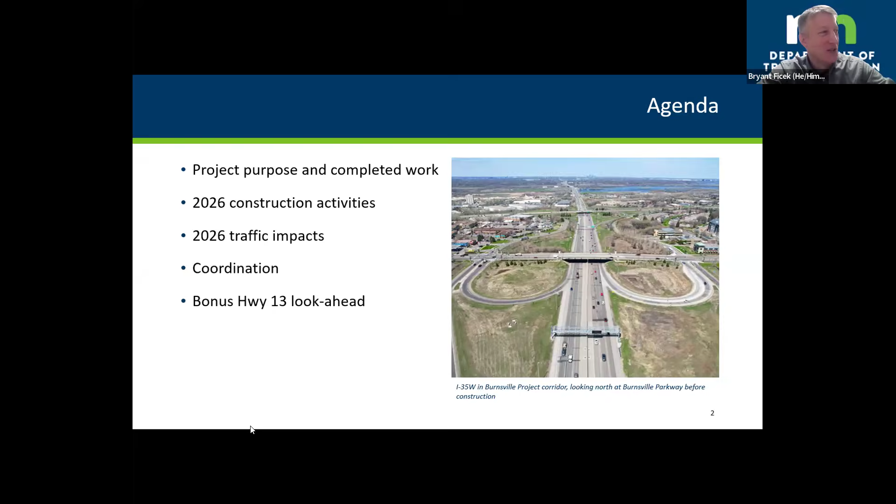The other items on there are a drainage system. As when it rains, when we have events, we want to make sure we're handling that appropriately, not only conveying the water where it needs to go, but treating it, and then lighting, making sure it's well lit, so when you're traveling at night, it's a safe environment. And then where we have exit and entrance ramps that come down to local systems, we want to make sure that the facilities there for pedestrians meet our ADA requirements and are easy for people to get around.

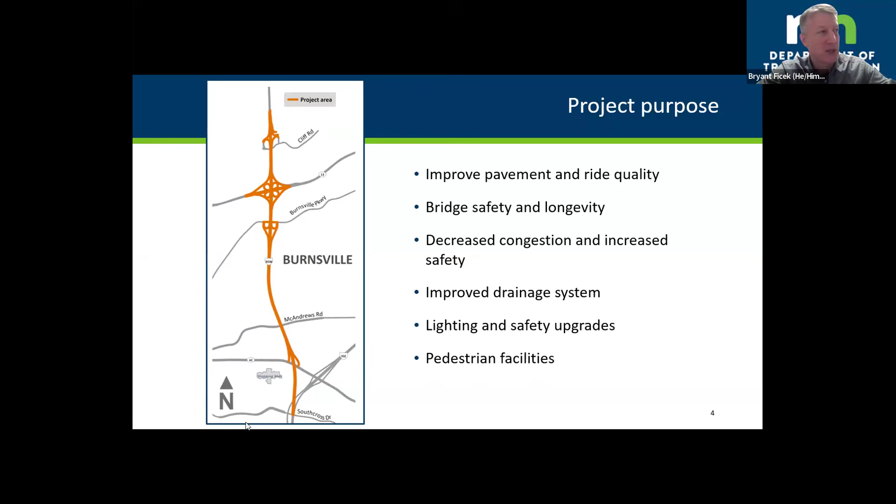So lots of things we're doing on this. This is a big project, and as I flip the slide here, you have a 2-year construction timeline. It's not going to surprise anybody. We did a lot last year.

The way we had split it up was in '25, we were working on southbound 35W, replacing those bridges, doing the pavement work there, and down by the mall getting the roundabout put in and a different way to exit as you come to County Road 42. Now in '26, we're looking at flipping and doing the northbound side and a couple more bridges to replace as mentioned on the screen there.

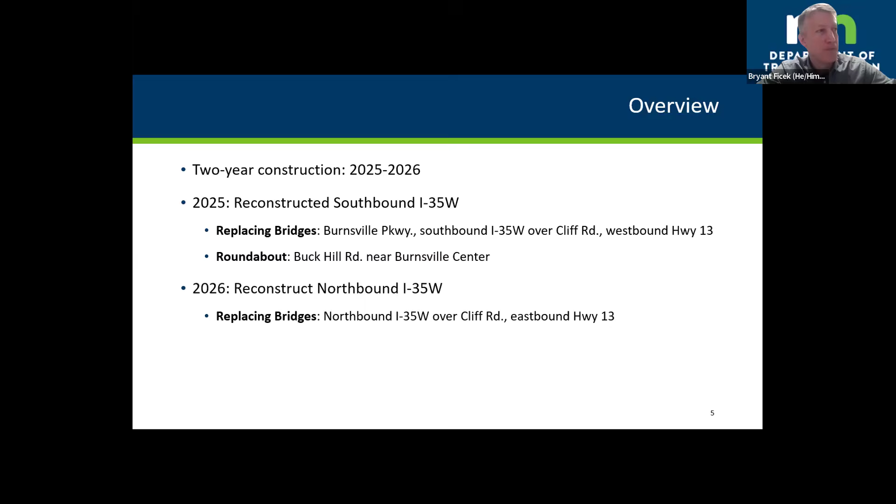So completed work: what we did was work on that southbound side — the pavement, a little bit of road widening there, worked on westbound Highway 13, the bridge reconstruction, and redid the ramps. Burnsville Parkway, as I know some of you are painfully aware, that bridge was removed and reconstructed. That is up, I've been through that a number of times. I think that looks really nice. Really good outcome on that one.

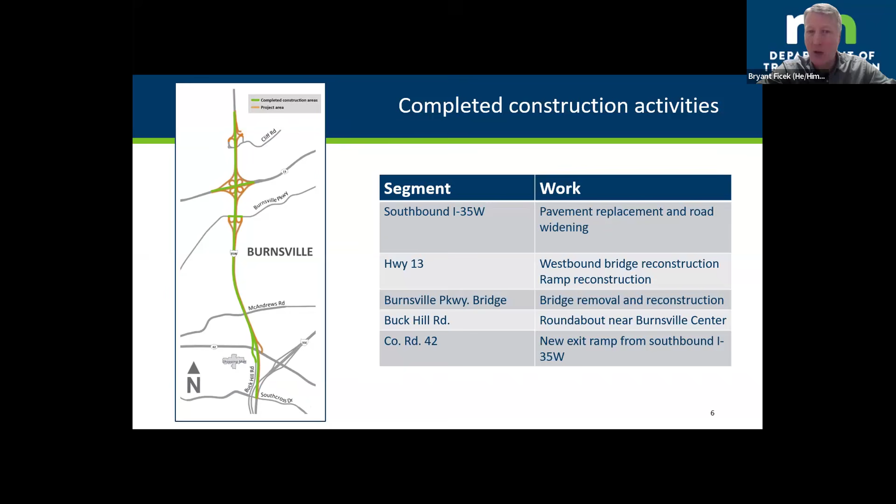And then Buck Hill and County Road 42, we did those changes down there with the new exit. So if you want to head east on County Road 42, you're now going under the bridge. You take the exit, you go under, and you loop back around through the roundabout and then come up to take a right turn to head east. A little bit different way to handle some of the traffic there, which should be helping with some of the congestion that we saw in that area. So all good work in my opinion — that is opening that area back up and helping with safety and mobility.

So now, as we look towards 2026, we will officially begin in April 20th. And the first thing on that list is completing the southbound I-35W bridge over Cliff Road. This was an area that, due to some factors discovered during construction as we got out there and actually dug into the ground, we got delayed on, and we weren't able to fully open it over the winter as we had hoped last year.

So there's a little bit of work to do on that bridge to get that going. Once we have that one, that's when we will flip traffic over. We'll then work on that northbound side and do the pavement work, do the widening, work on those bridges and reconstructing those ramps.

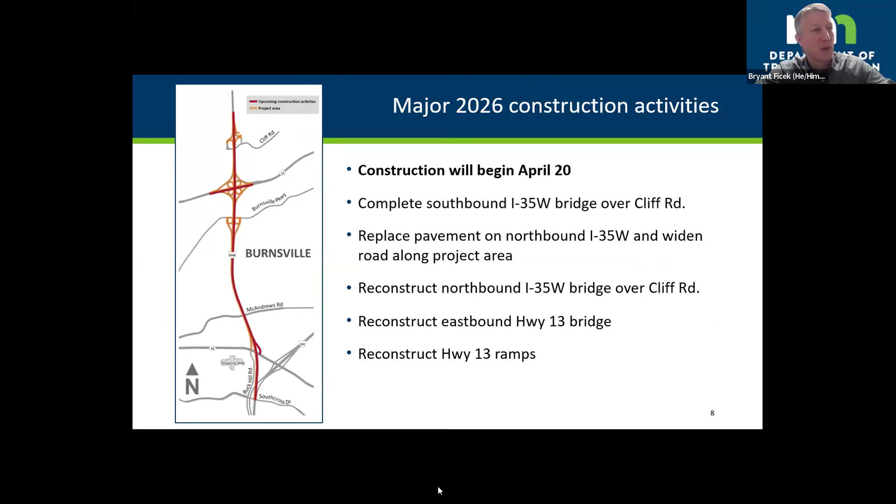So most importantly, let's talk about what those impacts are. With our work on the southbound side, Cliff Road remains closed. Immediately when we finish that southbound work, we're going to be working on the northbound side. So Cliff Road will continue to be closed through October, basically through this year.

And then the other bridges, once we finish that southbound work, we're going to be looking at doing the other bridges, getting eastbound Highway 13 and northbound 35W. The map on the left side tries to show where some of those closures are going to be, might be a little hard to see, but we'll go through that.

Just a little background, we started this a few years ago before I was in my current role. They did a corridor study on the whole area covering Nicollet through Dakota, looking at Burnsville and Savage, determining what are the issues out there and what do we need to do to make improvements in these areas.

As people well know, there's a lot of freight traffic that comes through, particularly on the west side. We've had our issues at Nicollet with that signalized intersection, particularly for pedestrian connections back and forth. We've had some tragedies there that are front and center on our mind as we think about improvements in these areas.

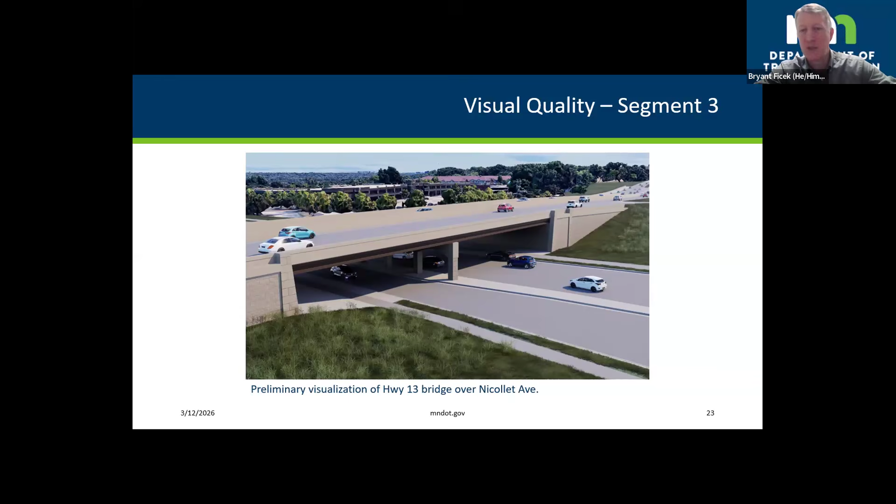So getting into a little bit of the schedule here, we are currently working on our environmental documentation as well as the design. We expect to finish that up this spring or early summer.

Ongoing right now, we are talking about the potential for noise walls in a few areas along Highway 13. People who could be impacted by those noise walls have already been notified of this, and we sent out direct mailings to those people that would be directly impacted. There are some meetings focused on this, had one yesterday, another one coming up in Savage, and another one later in March, just a virtual meeting. There will be more meetings on the Highway 13 project as we continue forward, but that's what we have right now.

So that's when we expect to bring in our contractor to start working on this for the Nicollet and 13, which will happen later this year. In August, we expect to bring a contractor on board. And then the other segment from Quentin to Washburn, that'll be in '27. So we have construction on there, Nicollet starting in early '27.

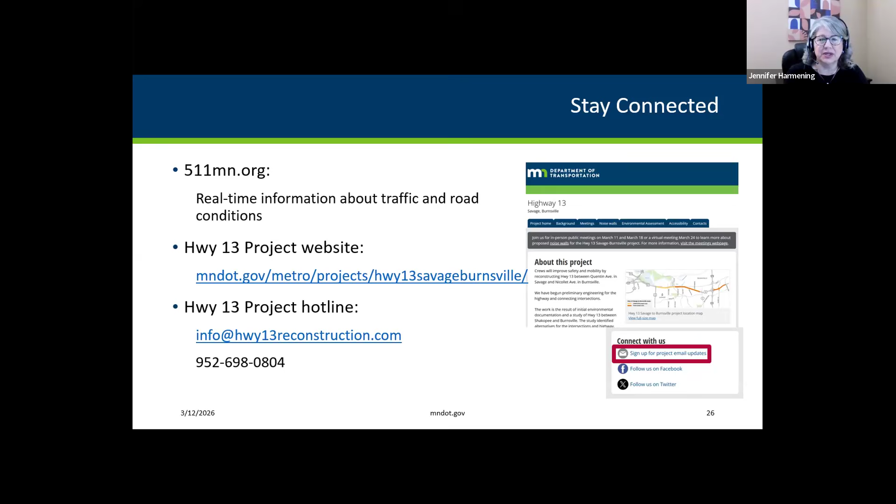I think one question I'll go back to, just confirming: this summer we're really focused on the northern half of Burnsville, so it's not going to be the entire Burnsville like it was last summer with the Burnsville Parkway Bridge done and the County Road 42 off-ramp done. It's really the 13 and the Cliff Road area, kind of that isolated area where we're still going to have pinch points. That should all wrap up this summer before we launch into the Nicollet 13 project, which is going to be the bigger project for that area.

But once that area starts, the other stuff should be open for rerouting people around, right? Basically, correct. So yes, Burnsville Parkway is open this year. Other than those northbound ramps that we will have to get to at some point, we'll need to work on those ramps, but Burnsville Parkway itself will remain open, so that'll be a much better situation. Our focus is on 13 and Cliff for this year, and then next year will be the major impacts at 13 and Nicollet.

So we did a question in the comments kind of to that. So really the way to think about it is 35 is the focus in 2026. Then in 2027, you're going to see 13 and Nicollet is the big change. And then 28 and beyond is where the western portion of the 13 corridor project could be ramping up, but that timeline's still a little fluid at this point as funding is being identified.

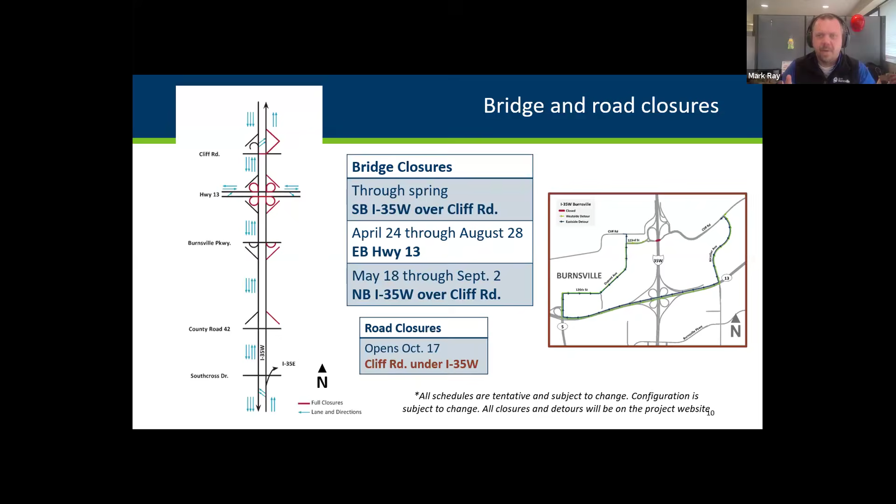We had another business question in the chat for phase two of the 13, kind of understanding what that scope is. I like to think of it more as the western portion of the 13 corridor project. So Bryant, I don't know if you want to just run through that again quick.

Yeah, Western, so it's our segment 1 and 2, the grade separation. With my screens right now, I can't see the chat. So is it just about what the layout is, or is it trying to look forward to what that construction might look like?

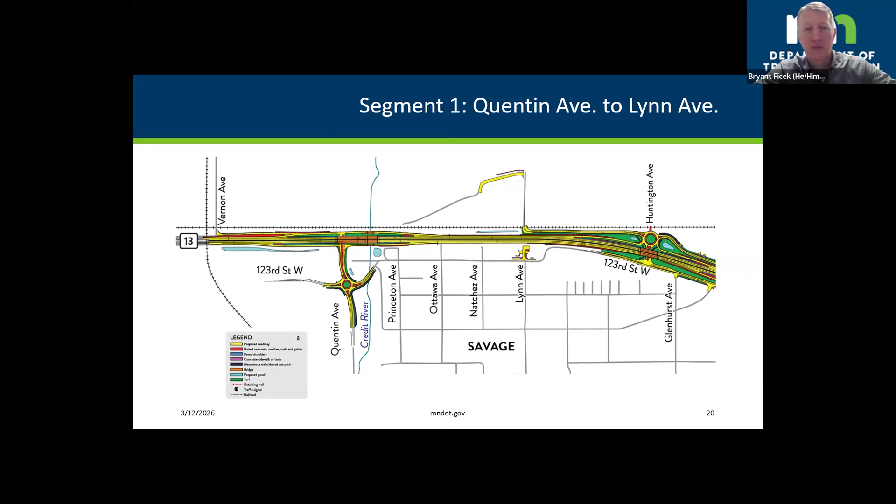Can you re-review phase two of Highway 13 work? Specifically looking at showing... All right, so I'll put this up then.